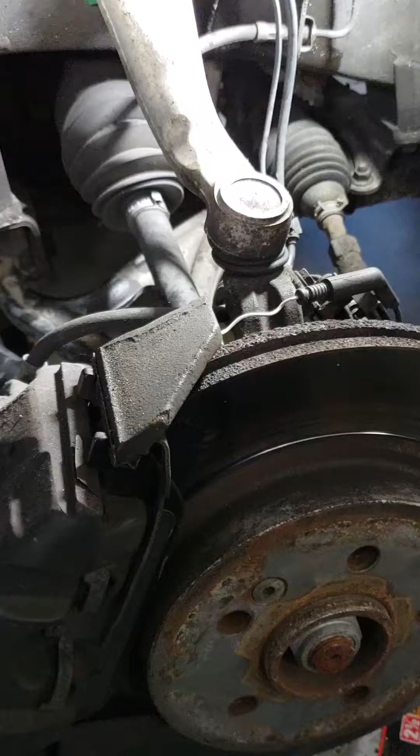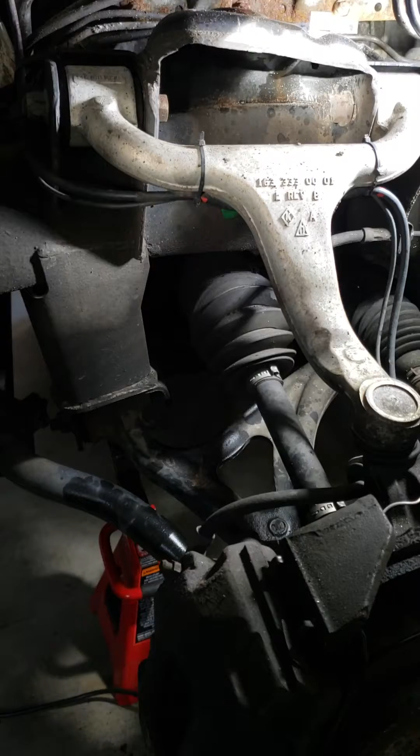Okay, I'm making a very quick video about replacing and disposing, or how not to dispose of, a front shock absorber on a 2004 ML350 Mercedes SUV. This is also true for, I think, the 98 through 2005 series.

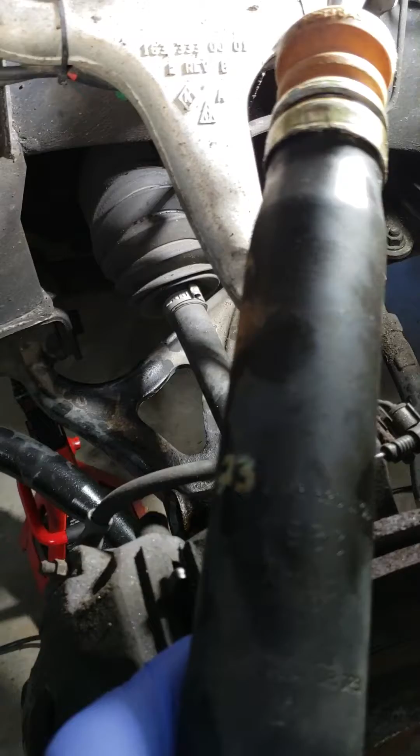I just want to make a quick note. I didn't show how to do this job, it's pretty straightforward, but I just want to show the parts that came off. This is the OEM shock absorber, if I can get it into focus here. It's got the Mercedes mark right there, and some grease pencil markings. Maybe the previous owner replaced it, I don't know. I've had almost 100,000 miles since I got this car and never replaced them, so it's about time, well overdue. It's got the Mercedes part number, and you can see it says Made in USA.

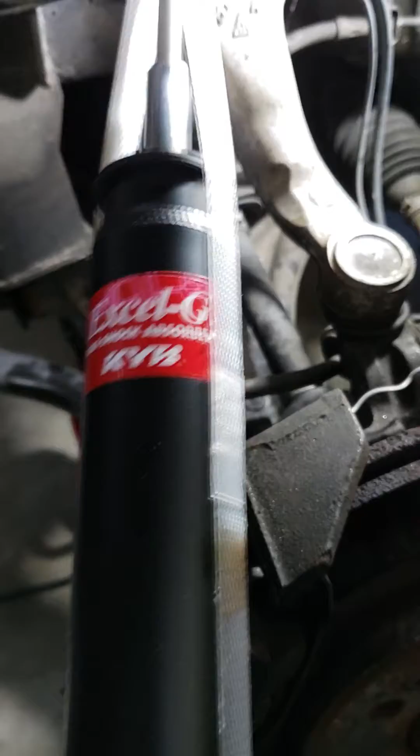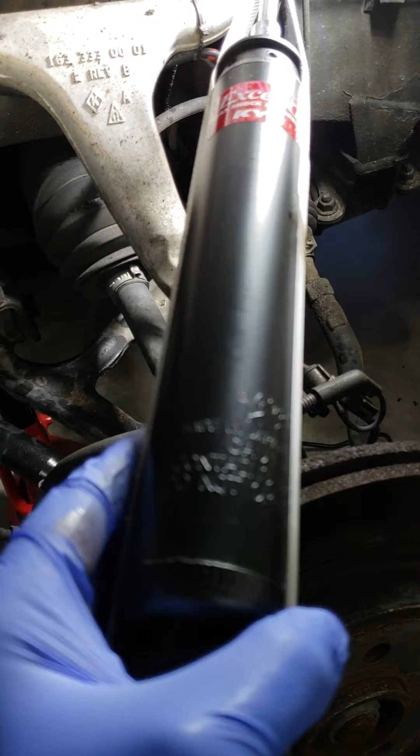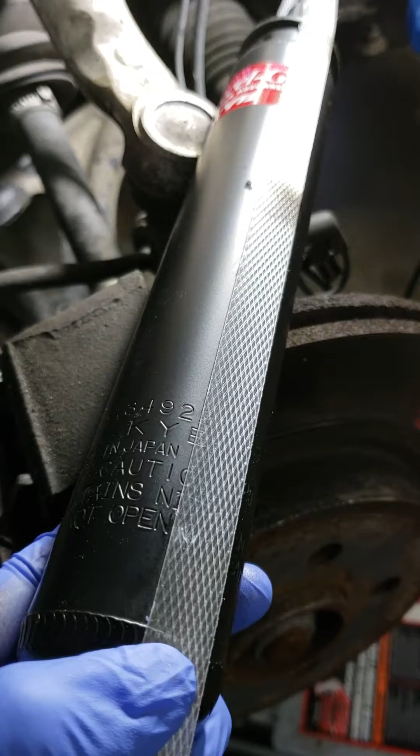It also says KYB, so these are made presumably by KYB for Mercedes. I managed to get a hold of a set of KYBs, which I've used on other cars before. KYB Excel-G, great price, I think I got it for $55 a piece on Amazon. These are made in Japan. It says contains, I think it says contains NO something, but it's a gas shock. It says caution, do not open right there.

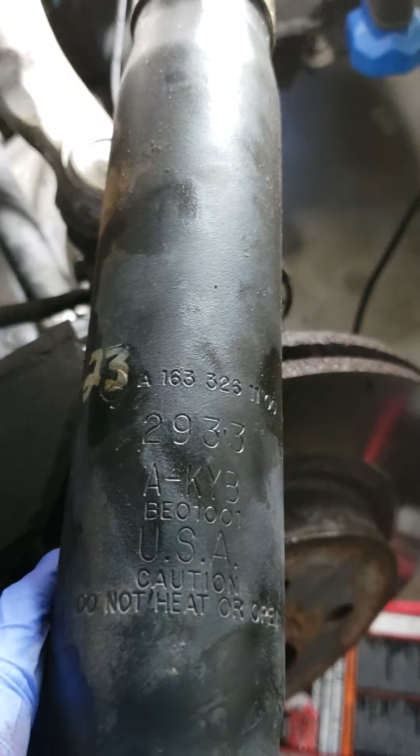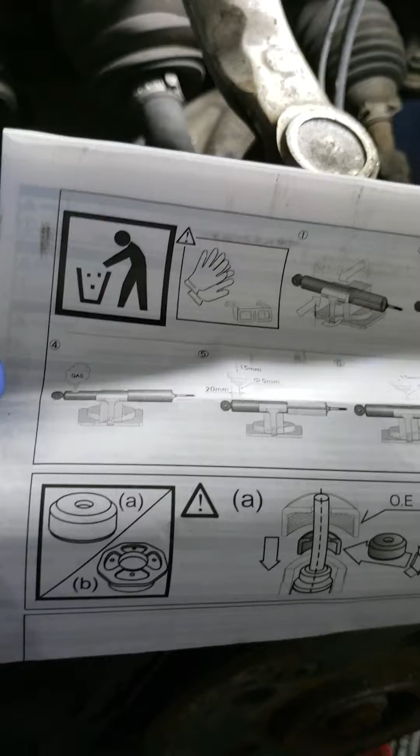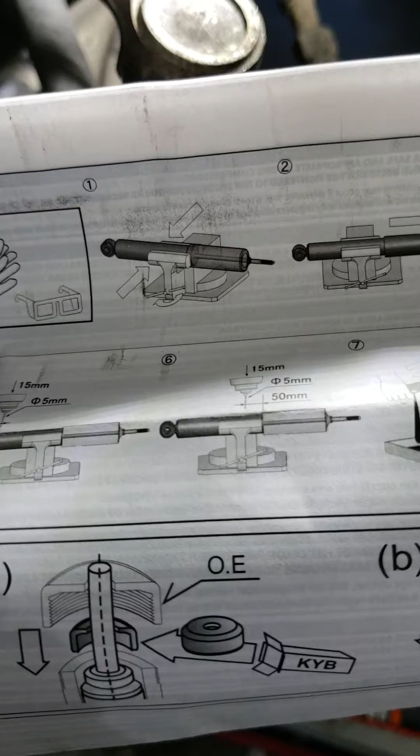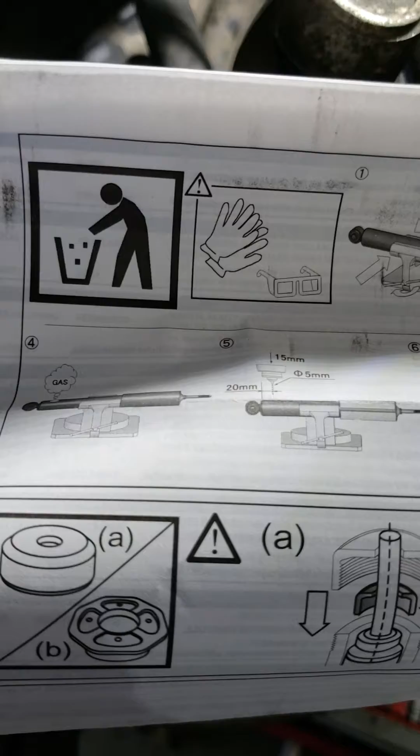Okay, well that's consistent with the warning on the original one, which says do not heat or open. The part that's confusing me is in KYB's own safety instructions, which talk about how to dispose of it. It says put it in a vise, gas in one end, they want you to drill into it. They give you the size specs, drain out the oil, and then be a good boy and throw it into your recycling center. I am not sure what to make of this, since both KYB products say do not open. This right here says gas. So what's going on? If somebody could explain that to me, maybe this is referring to a standard shock, but they should be a little more clear about this.

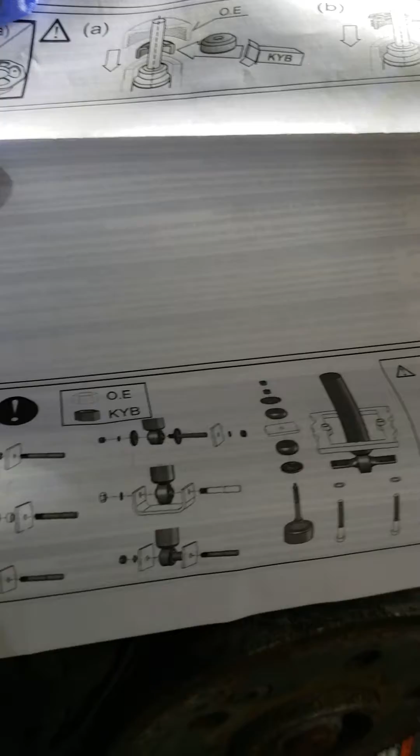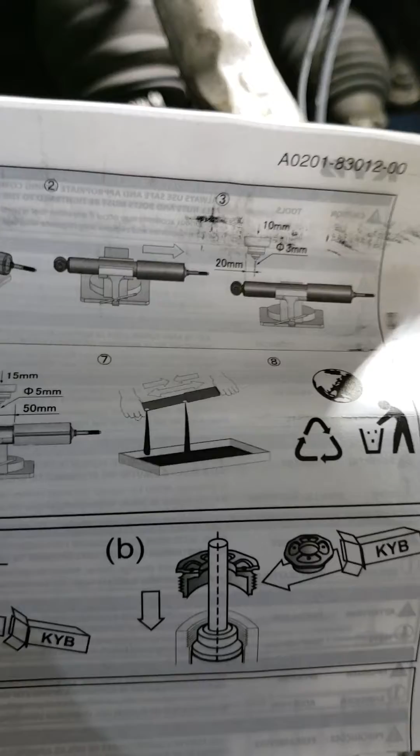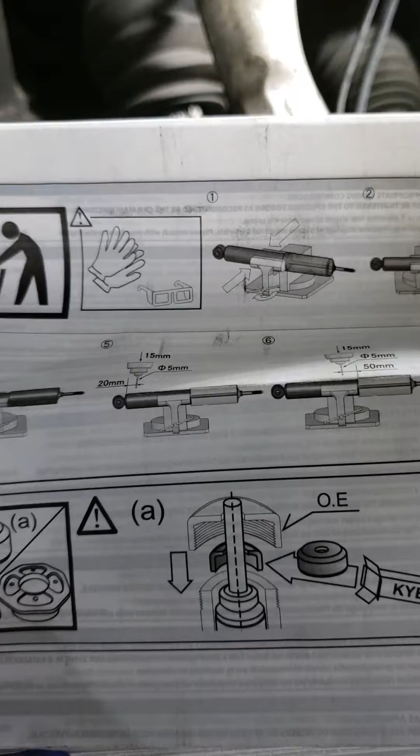I know they're trying to make one set of instructions for the whole world, but that's not something I just want to take for granted and attempt, because if I didn't look, not that I was going to drill into it anyway, but if I didn't look, I wouldn't have seen that warning on the ones I just took off the car. And anybody who wanted to play along with this environmental message and dump out the oil, that's not something I've ever done. If you're worried about how to throw them away, go to your recycling center, ask somebody locally, ask a shop what they do with them. But heads up, do not start drilling into shocks, especially if they're gas shocks. And KYB really needs to get its act together to clarify this warning.

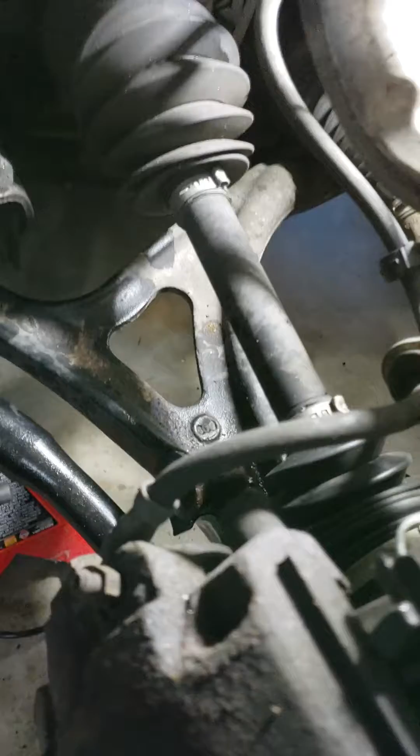Anyway, other than that, the job went pretty easily with a little bit of persuasion. I'm going to get these things on in the next couple minutes. Well, the other side's already on. I'm going to finish this left side here.

But other than that, yeah, I think it's probably true with all the other brands too, KYB is a gas shock. I don't know about the Bilsteins, but if you're going to try this on your own, don't be drilling into your old shocks. It's just not worth it. Thanks.